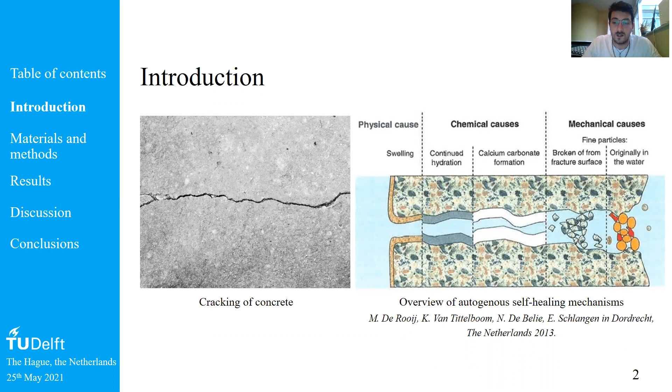The thing is that during the last 10 to 20 years of research, the scientific community determined the maximum healable crack width that concrete is able to self-heal, that is in general around 100 to 150 micrometers, of course depending on many interrelated parameters related to the mixture.

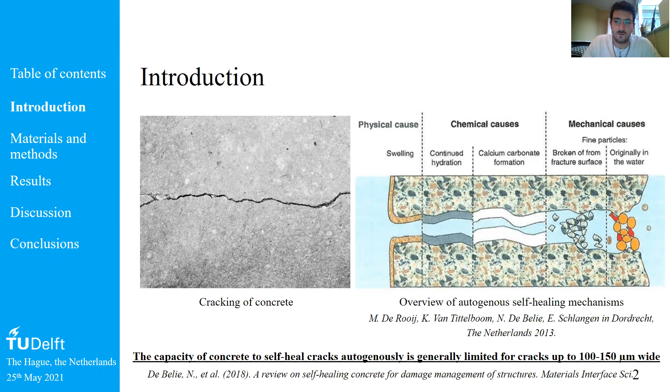Therefore, since self-healing of concrete might theoretically improve a lot the service life of our infrastructures, a lot of research has been spent during the last years to try to improve this self-healing capacity of concrete through many different technologies, such as including fibers in the matrix, so as to limit the crack width to one healable by the concrete, or encapsulating many different types of healing agents that release as soon as the cracks occur and then fill up the crack.

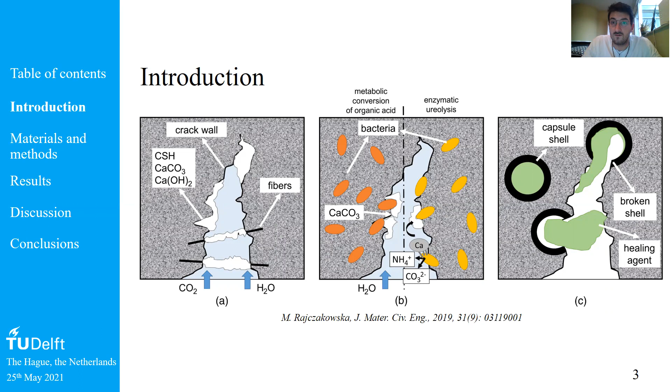And also through embedding bacteria-based self-healing agents in the matrix. So by including bacterial spores and certain nutrients and substrates in many different encapsulating techniques, these bacteria metabolize these substrates and cause precipitation of crystals that can fill up the crack. And this is the major group that we're going to talk about today.

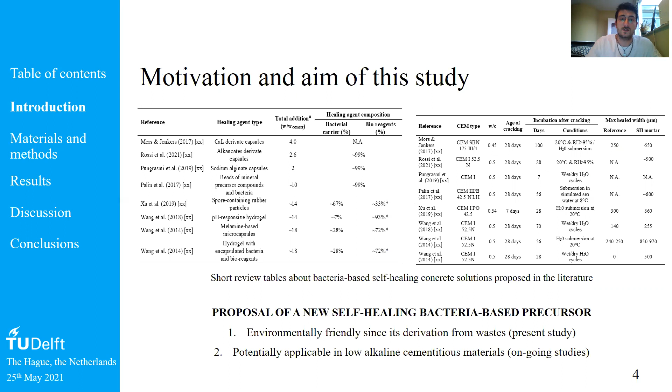And on the right, we can see that most of the healing agents proposed in the literature have been applied in Portland cement based mixtures. And what we're going to do today is try to evaluate the applicability of a precursor that is alkanoates based, that is made of wastes that are processed beforehand, so it is theoretically more environmentally friendly than other techniques that have been proposed in the literature.

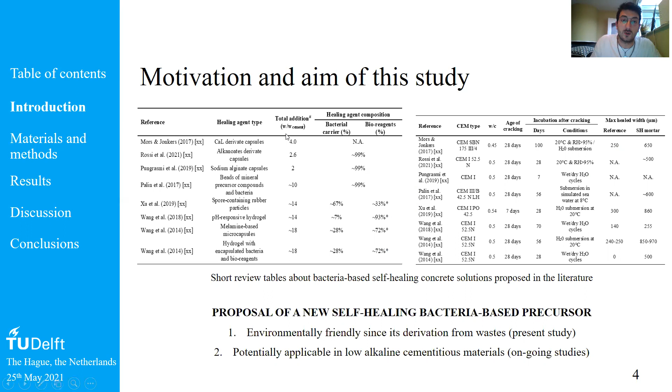This part is going to be presented today. And this substrate is also potentially compatible with low alkaline cementitious materials, and this is part of ongoing studies that is not going to be presented today, but it is still a potential further application and benefit of this healing agent.

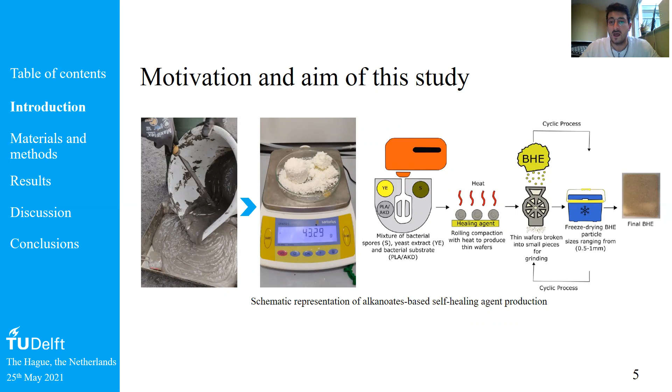And then we merge this bioplastic with nutrients for the bacteria and bacteria spores, and through a certain production process, we get to the final healing agent that is powder-like, generally between 0.5 and 1 millimeter in dimension. And then we embed this healing agent into the matrix while we mix our specimens.

And well, in order to evaluate the applicability of these healing agents, a former PhD of our department at TU Delft, Eirini Tziviloglou, proposed three factors, let's say, performance that needs to be evaluated when investigating the applicability of a certain healing agent in terms of its self-healing capacity. These are the occurrence of mineral formation thanks to the healing agent that is included, the regain of water tightness, so the crack sealing capacity of the material, and also the evidence of bacterial activity.

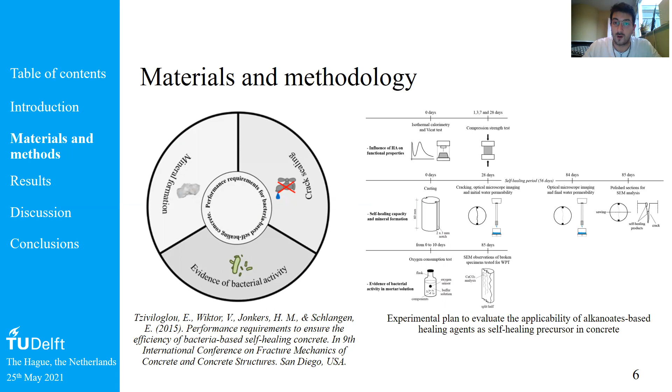So according to this, we conducted a sort of experimental plan for Portland cement mixtures that aimed to evaluate the self-healing capacity and mineral formation of this system, the evidence of bacterial activity in the mortar, and also a little bit the influence on some fundamental functional properties of the material. And that is indeed the point that we're going to start with.

So for all these experiments, we did three series: a control series made of plain ordinary Portland cement mortar with a water-cement ratio of 0.5. A positive reference, let's put it this way, that embedded 2.6% by mass of cement of PLA or calcium lactate derivative healing agents. That is the one that Henk, my supervisor, and many other PhDs investigated during the last 10 to 15 years. And we did another series with ordinary Portland cement mortar including the same percentage of healing agent, but with an alkanoates-based healing agent. That is the one that we produce, named AKD.

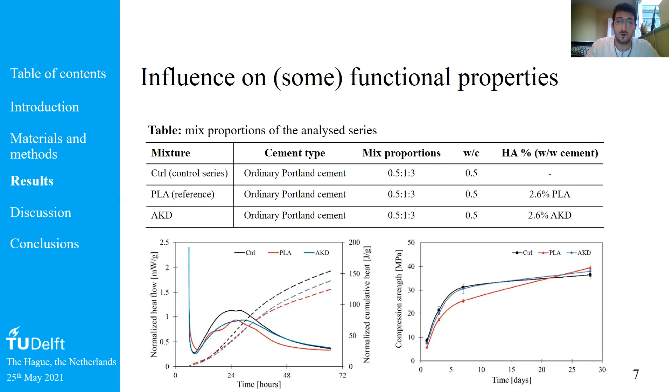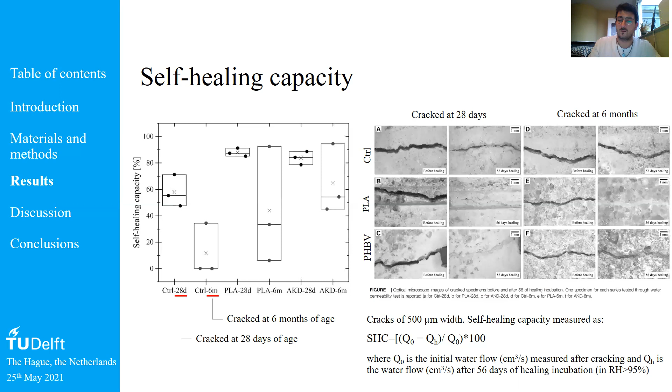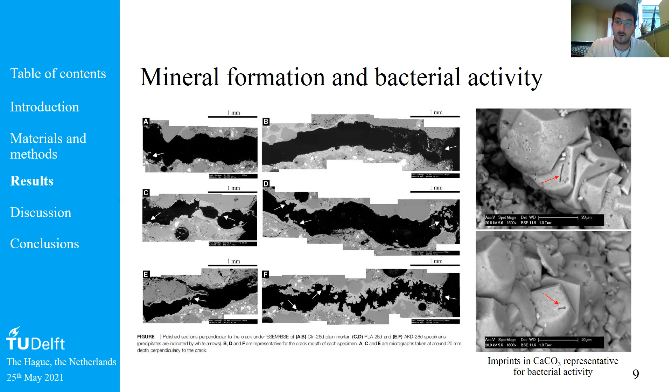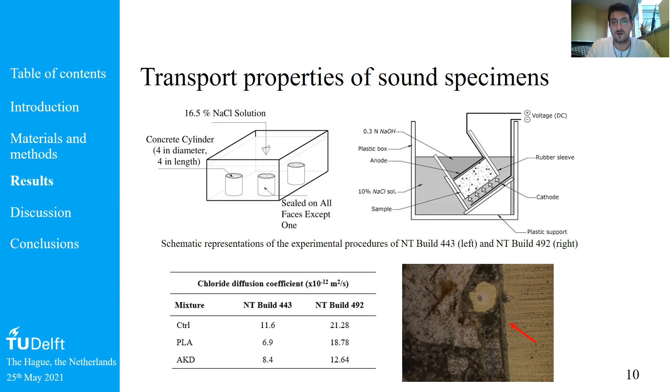So we evaluated quite a few characteristics of our material that could confirm the applicability of our healing agents with self-healing ordinary Portland mortar. What is also very important is that, for infrastructures exposed to pretty aggressive environments, such as with a high content of chlorides, it's common, especially here in the Netherlands, to use slag cements with high slag content, such as CEM III. In a country like the Netherlands, with more than 450 kilometers of coastline, the market share of slag cement is over 60%.

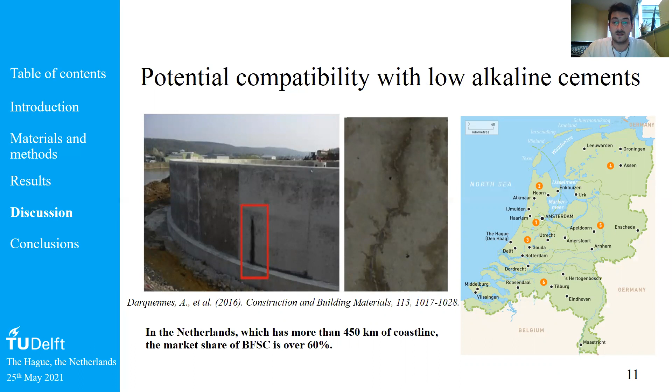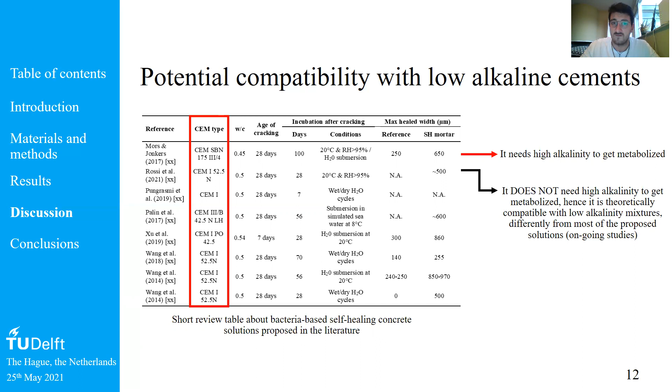However, a few healing agents proposed in the literature are not really compatible with low alkaline cements. Especially the one we took as a positive reference, the calcium lactate derivatives, needs high alkalinity to get metabolized by the bacteria. While in our case, the AKD-based healing agent does not need alkalinity to get metabolized, and therefore is theoretically compatible with low alkalinity mixtures. That is different from most of the proposed solutions. The compatibility of our AKD-based healing agent and the self-healing capacity of low alkaline cementitious materials is under investigation in ongoing studies, and I hope to present some positive results in the coming future.

So to conclude, from the present study we can say that the application of 2.6% by mass of cement of AKD-based healing agent, around 10 kilograms per cubic meter of mixture, did not negatively influence the major functional properties of Portland cement mortar. The applicability of the AKD-based healing agent has been demonstrated through the three factors proposed earlier: mineral formation, regain of water tightness, and evidence of bacterial activity.

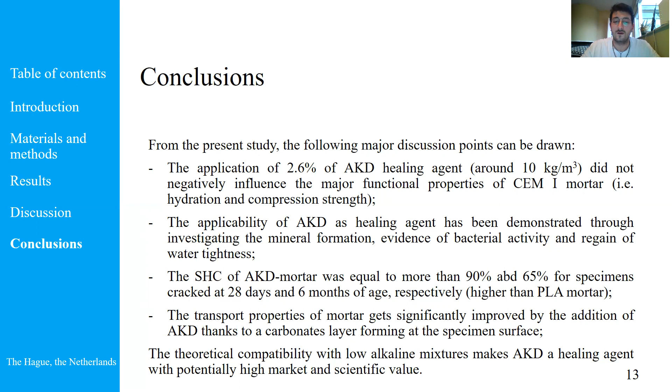The self-healing capacity of AKD-based mortar was more than 90% and 65% for specimens cracked at 28 days and 6 months of age, and it was higher not only than plain mortar specimens but also than the positive reference specimens. The transport properties of mortar get significantly improved by the addition of AKD, thanks to a carbonate layer forming at the specimen surface. And the theoretical compatibility with low alkaline mixtures makes the AKD-based healing agent potentially of high market and scientific value.